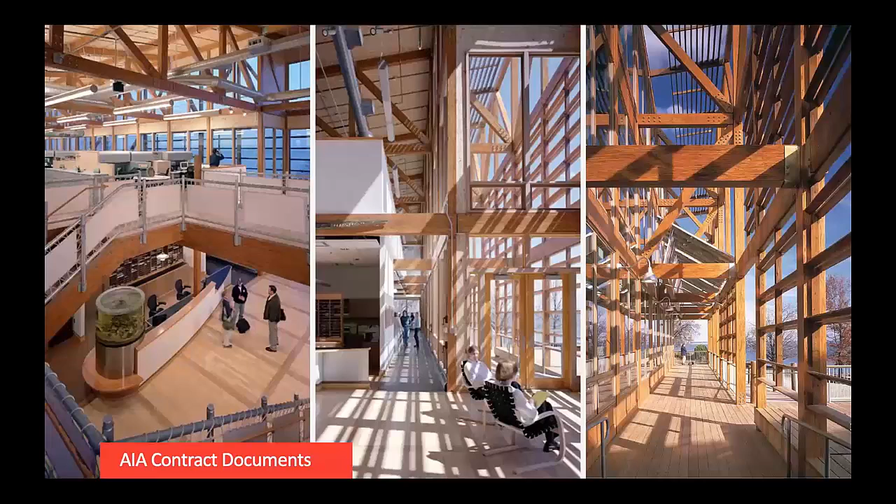All wood products are susceptible to moisture, but the use of small pieces glued together increases that risk, requiring selection of a moisture-resistant adhesive and protection, particularly in outdoor environments. Remember, the location on the bay makes this a particularly challenging environment to introduce this type of building into. Weyerhaeuser hired Permapost to apply a low-emitting preservative to the exterior wood members. It was called Polyclear 2000. Leaks were discovered in 2001 and 2002, and rot and deterioration were discovered in the late 2000s.

So let's move to the dispute. The foundation, Clark, and Smith Group entered into a settlement to remove and replace all the exterior Parallam beams. You can imagine what a nightmare that was. They filed suit against Weyerhaeuser for $9.6 million, and eventually Weyerhaeuser settled for $3.5 million and pursued Permapost in a separate action. There was no binding precedent due to the fact that this was a settlement, but we do have a court order on several motions that give us some clues as to the details of the dispute. Next.

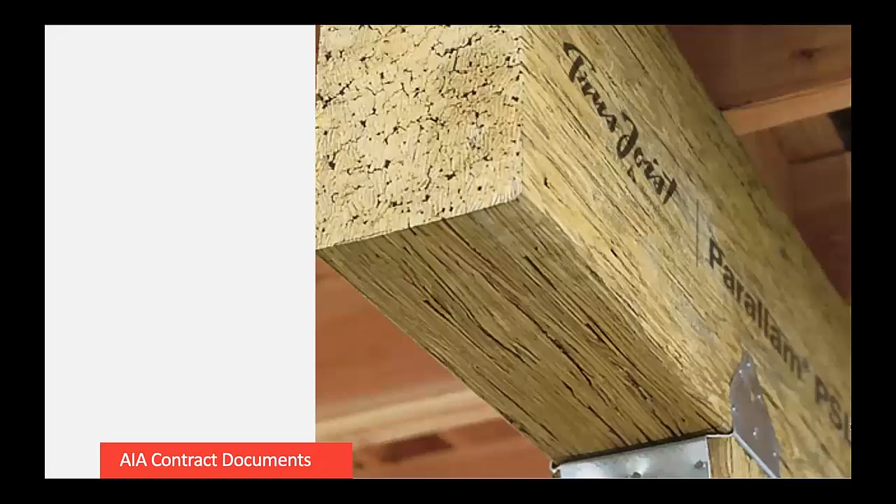Ultimately, as with everything, the key to successfully completing a sustainable project is communication among the parties. When addressing green products that do not have a proven performance history, the owner and architect need to communicate to properly understand the owner's goals and what can be done to meet those goals. And the owner also needs to understand how the selection of materials and equipment can affect how the project operates and the usability of the project. The contractor needs to understand what it is required to do and why certain elements have been selected.

The AIA documents prescribe a process as follows. The architect informs the owner that A, the project may require materials and equipment that have had limited testing, and B, that the architect may not be able to confirm the manufacturer's representations. The next point is that the architect discusses possible effects with the owner. The owner then renders a written decision regarding use of such materials and equipment.

The final point is that the architect is not responsible for failure of materials and equipment to perform according to manufacturer's representations. In reality, communication is important for all projects, but sustainable projects just reinforce this importance. Next slide.

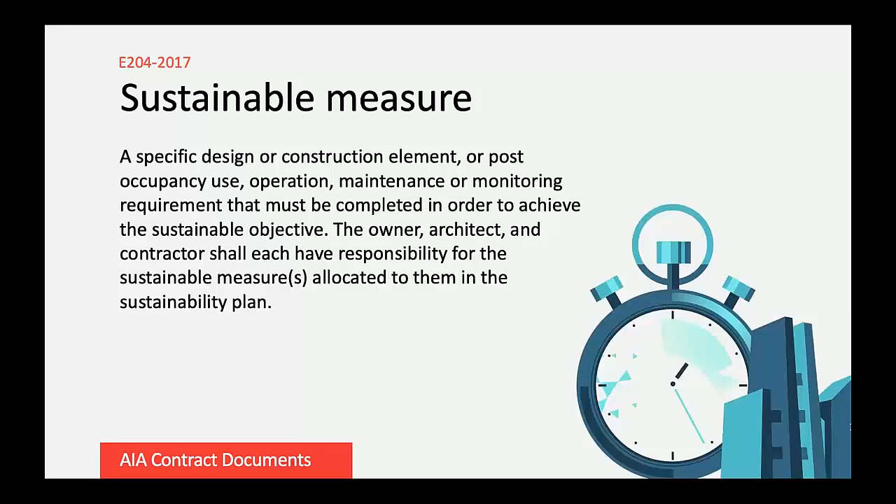The B101, the 2017 version, the current version, has a fill point in the initial information for identification of the sustainable objective, if there is one. Next. A sustainable measure is a specific item that must be completed by each party in order to achieve the sustainable objective. Next.

The sustainability plan is the document prepared by the architect showing the allocation of sustainable measures to each party. The owner, the architect, and contractor have responsibility for the sustainable measures allocated to each of them in the sustainability plan. And as mentioned, Tracy will go into greater depth on the sustainability plan later in the presentation. It's important to note that the sustainability plan is incorporated as a contract document. Next.

The WELL certification system integrates scientific and medical research on environmental health, behavioral factors, and health outcomes. Passive House, the major components of that system are a super insulated envelope, ultra high performance windows, airtight construction, and elimination or reduction of thermal bridging, heat recovery, ventilation, and the use of minimal space conditioning systems. And finally, Green Globes, which I discussed earlier, and provides that globe certification by number of globes. Next.

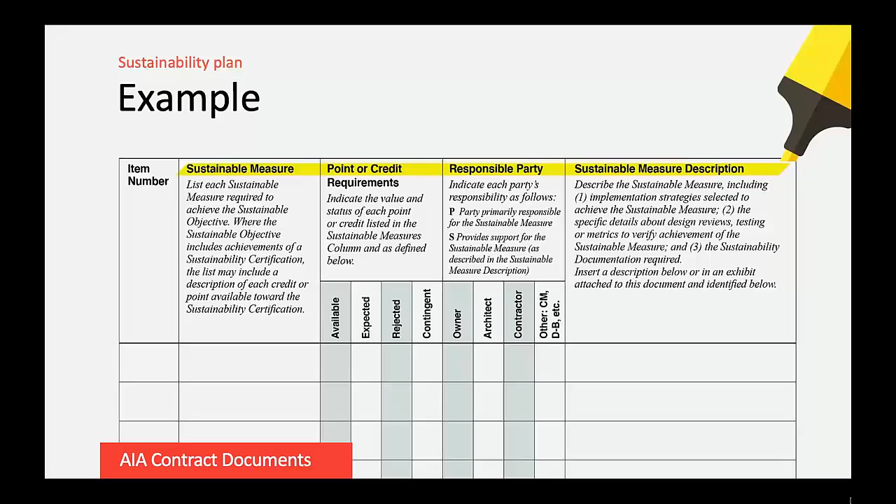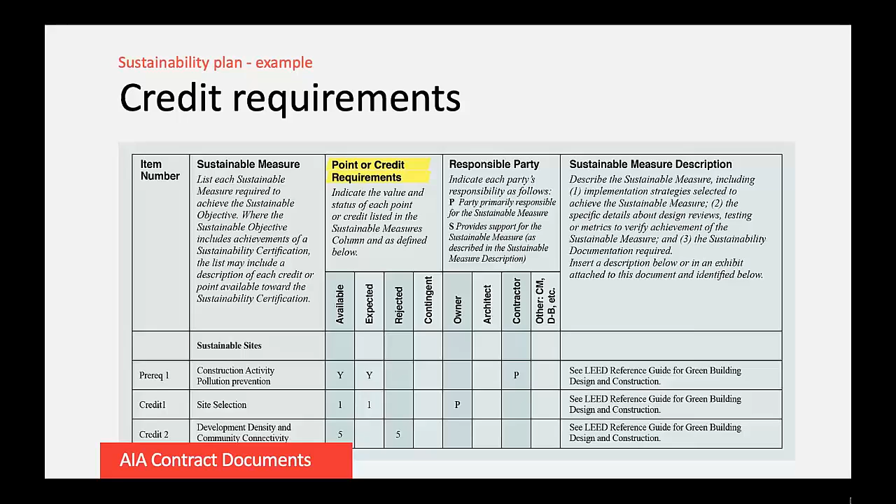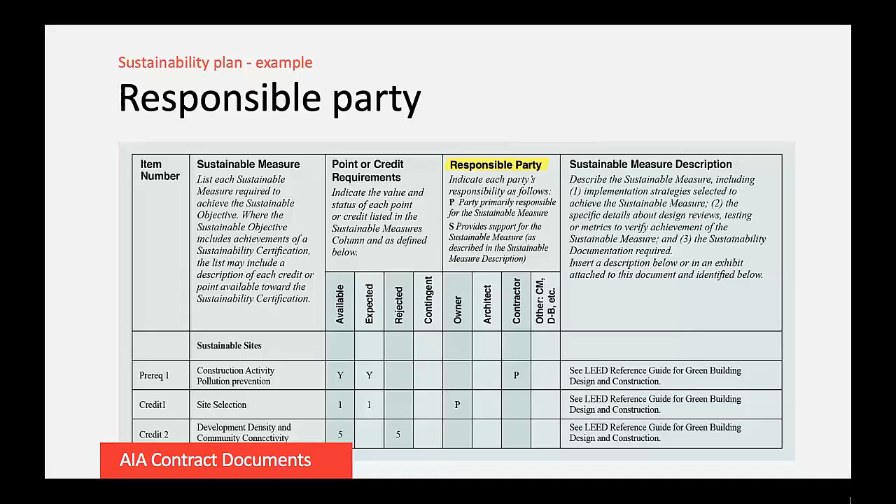An item number or a numbering system, just to keep track of things. A listing of the sustainable measures, just kind of a titling for reference. If there is some kind of certification path that is part of the sustainability plan, there's an opportunity here to include some analysis of that. Allocation of responsibility, who's responsible for taking care of the requirement, and then a more thorough, deeper description of what each of the requirements, sustainable measures will be.

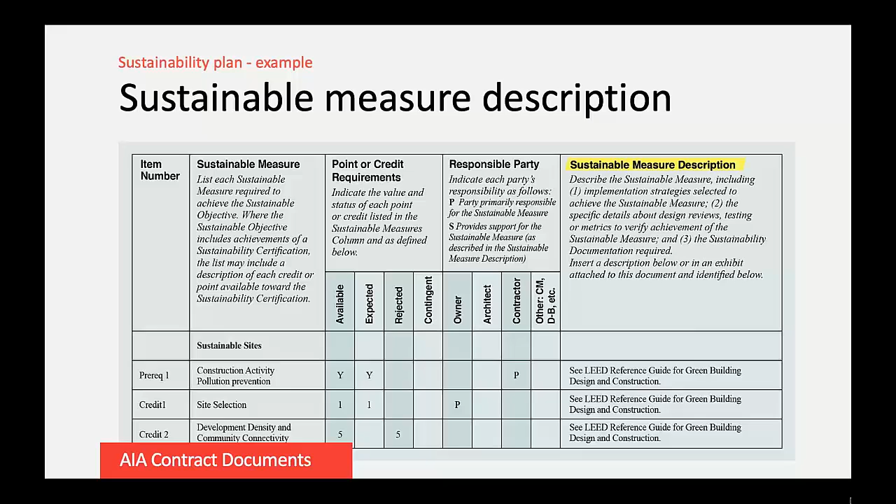This example that we're using here today comes from the D503 document, and it's tailored toward the LEED certification path. The item numbers are equivalent to what's on the LEED scorecard, if any of you have encountered that or done a LEED project. The sustainable measures are kind of a description that's straight out of the LEED certification instructions. The point or credit requirements will be familiar to you. They're the usual kind of yes, no, maybe allocations that one finds in the LEED scorecard. Responsible party is something that you won't find in the LEED scorecard, but we've stressed the importance of that here today.

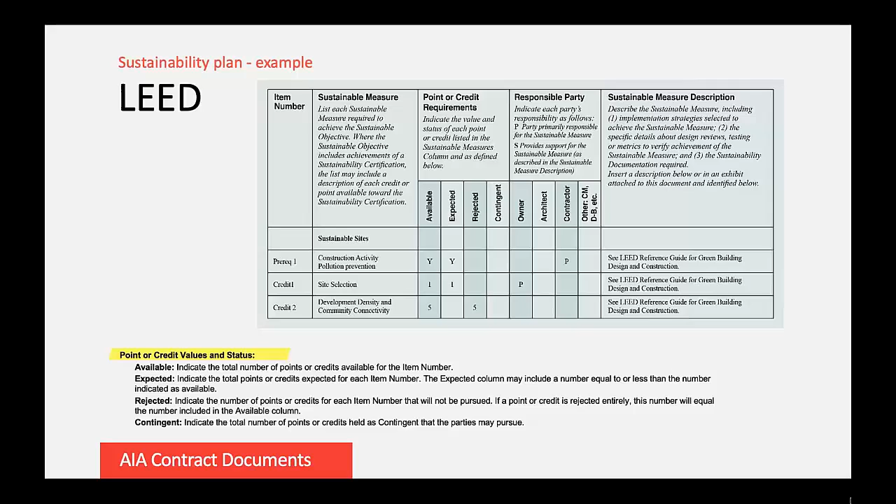And then the description in this case can be as simple as just referring to the reference, the LEED reference guide, for a more involved description of what that particular sustainable measure is.

Here's another example from the D503 that's patterned after the International Green Construction Code that was discussed earlier. It's very similar. The numbering system is mapped to the way that that document is numbered and organized. Sustainable measures are more or less copy pasted directly from the document just for continuity.

In this case, there isn't really a point system, but there's a place to designate whether this particular aspect of the IGCC is applicable to the project, whether it's expected or whether it's maybe contingent on some other part of the sustainability plan or the code. Again, allocation of responsibility, primary and secondary, and then a description, which is a kind of an analysis of what the code requirement may be, in this case of the IGCC.

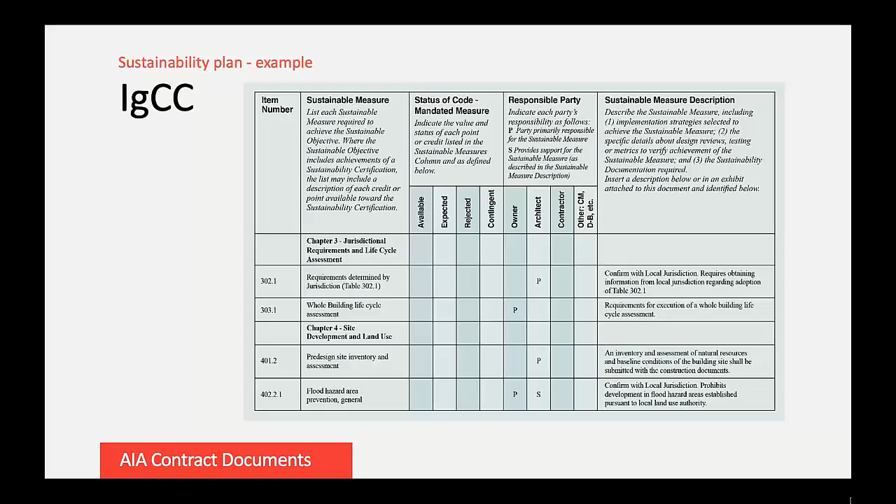So all of these things are contained in the Guide to Sustainable Projects, and if you plan to do a project like this and use the E204, I encourage you to consult that. It's a very useful document that was just recently updated, so it's very current. It's just a few months old now.

So how does the E204 integrate with the B101 owner-architect agreement, or 103? We'll talk a little bit about this. The B101-2007, so not the current version, but the preceding one, divided the architect services into the traditional basic services that we all know, and additional services. And then the additional services were further subdivided into two types, one that could be discussed and agreed on between the owner and the architect before commencement of the work, and the second one that happened as a course of construction due to unforeseen conditions or other things that arise during the construction phase.

The 2017 edition of the B101 acknowledged that, but tried to make it a little clearer by introducing the concept of supplemental services. So now instead of two, we have three flavors of services: basic, supplemental, and additional. And the supplemental services really are just the same as the additional services previously that could be chosen from a menu and agreed on in advance of the execution of the contract.

So that's found in the B101 Article 4, and many of you, I'm sure, are familiar with the table that is to be filled out in a B101. And it's set up so that if there are additional services chosen in the table, then there's a way to structure compensation for those separately. For instance, you might have a basic compensation that's based on a percentage of the cost of construction, but if you choose to do additional supplemental services such as sustainable design, you may want to negotiate a lump sum or some other method of compensation for that.

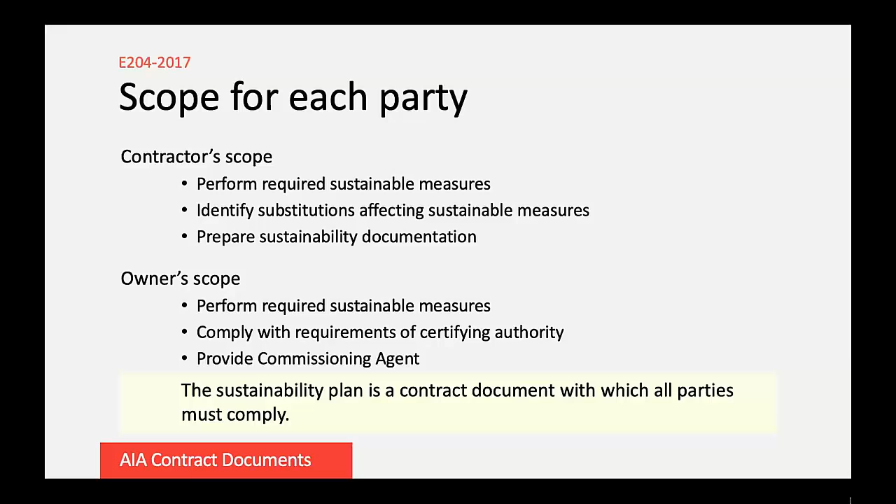And then just to stress yet again, the sustainability plan and this whole process, including the E204, the way it's structured here, these are contract documents, so they're legal obligations of all the parties involved: the owner, architect, contractor, subcontractors, consultants. Everyone involved in the process is legally bound to try to live up to these requirements and the scope that's assigned to them.

A few things to keep an eye on and make sure that you have a good understanding of going into a sustainable project. This is a list of a few things that we've identified that might need a little more attention than a usual project and may differ somewhat from the normal course of design services and construction as a result of the Sustainable Projects Exhibit.

Substantial completion is defined as the point at which a project can be occupied and used for its intended purpose. And the E204 makes it clear that, especially if there's a certification requirement in the sustainability plan, this is something that the contractor may not have control over. And those of you who have done LEED projects know that the certification sometimes happens a long time after the project is complete. So this attempts to make it clear through the language to owner and contractor that substantial completion isn't tied to the achievement of the sustainable objective. It isn't tied to LEED certification if there's a LEED path involved.

Just to make sure that everyone understands that final payments and lien release can't be withheld just because the LEED certification hasn't been awarded. But this sets up a situation where the owner may want a little protection because the contractor also has some responsibility for documentation in this. So there is the possibility of maybe the owner considering having a performance bond in place, or perhaps negotiating language that extends the normal one-year correction period that's prescribed in the A201, just to make sure that everybody gets their part of it done.

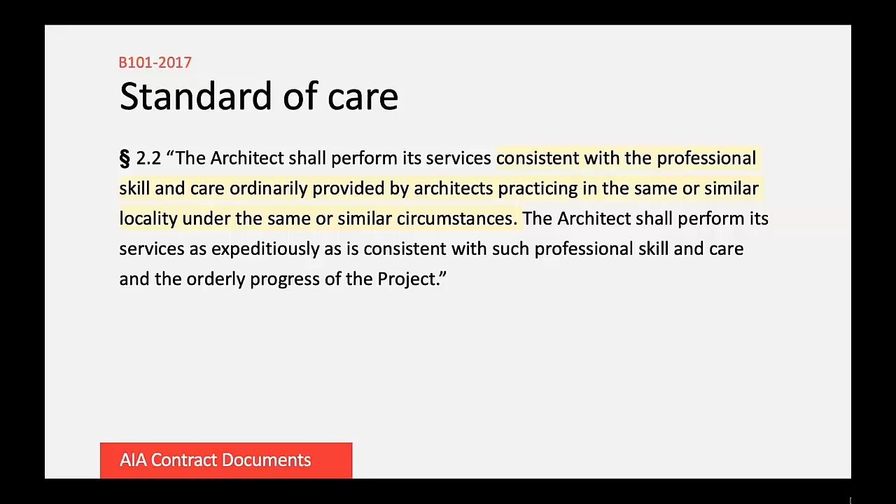And the reason for bringing this up in the context of the E204 and sustainable projects is that as the AIA and the profession begin to take on more responsibility about elements of sustainable design, there's a feeling that the standard of care may be expanding to the point that that's generally accepted practice rather than something that's exceptional. So just a caution to keep that in mind as part of your practice.

Related to the discussion about substantial completion and final completion is the notion that the contractor especially, but also the architect, is not guaranteeing or warrantying that the project will achieve the sustainable objective. There are too many unknowns and possibilities for pitfalls to give some kind of a guarantee that might be binding or might not be insurable. So this is something to bring up with your clients, if you enter into this type of agreement, to just make sure that they understand the implications of that.

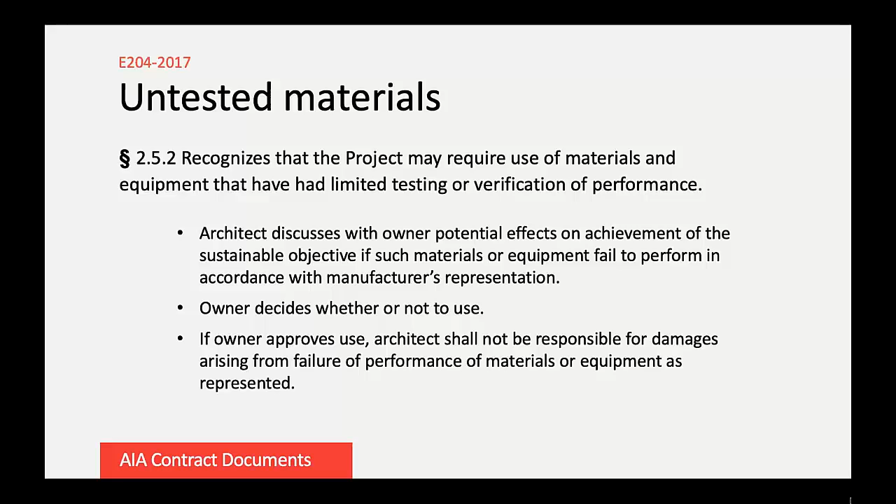The next piece that's discussed here is related, I think, to the case study that Wolf presented earlier, and some of the discussion that he gave about that sometimes achieving a very aggressive sustainability goal or objective may require the design professionals or the contractor to get out on a limb a bit. And it's just critical to understand, before anything becomes potentially an issue, that we're all in this together and the owner makes the ultimate decision about whether to pursue something that may be untested or unknown, such as in the Chesapeake Bay Foundation case. An example of how the case law and precedent has guided the AIA and the documents committee to structure the language of the documents.

Something else to take note of, especially with LEED, but certainly with Living Building and some of the other certification paths, the registration costs can be rather expensive, thousands of dollars, in some cases tens of thousands of dollars. So this language in the E204 just makes it clear to owner and architect that this is the case, and that if it's intended to be a reimbursable expense to the architect, then there's the possibility of collecting an initial payment to offset that from the beginning, so that the architect doesn't have to fund it.

Consequential damages. In the base B101-103 documents, there's a waiver of consequential damages, and by that I mean things that are typically unforeseen or secondary that might come out of a delay by the contractor or a delay by the owner, that might cause some kind of financial damage that's not directly attributable to negligence by any of the parties, but is a real number anyway, but very difficult to prove, and has been the result over the years of a lot of claims and disputes.

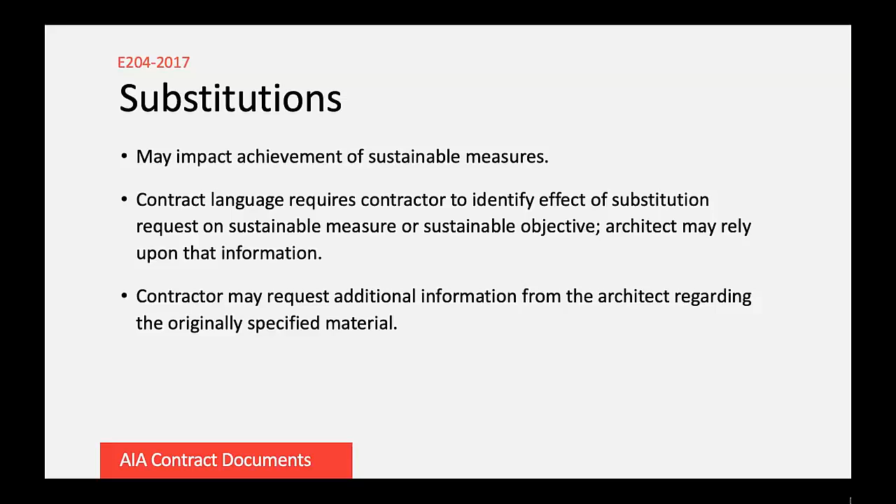The contractor may not have the background or the knowledge of why something was chosen or what its place is in the overall program of the sustainability plan. So the language of the E204 gives the contractor the right to ask for some kind of explanation or support or assistance from the architect in making a decision about a specification, a substitution.

So that kind of wraps up that part of the discussion about some of the particular things that architects should be aware of in entering into this kind of agreement. And I'll now pass it over to Wolf to talk a little bit about some things that are slightly outside the boundaries of what we have been discussing here today. Thanks, Tracy.

So just for the last few minutes of the presentation, let's focus briefly on the sustainable documents for construction management and design build. The E204 does not apply to CM projects. However, the AIA also offers a sustainable projects exhibit for construction management and for design build project deliveries. Both address the considerations we've already discussed and also address the CM's unique role in preconstruction services. Next slide.